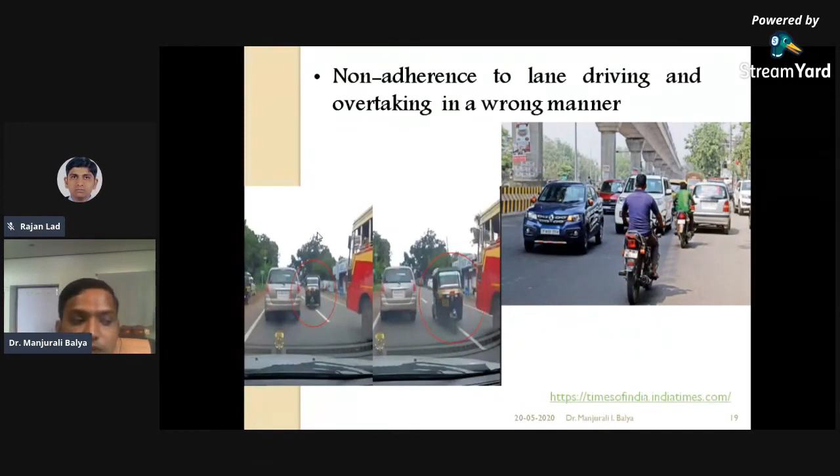Another reason is non-adherence to lane driving, or overtaking on the wrong side in the wrong manner. You can see in the picture that an auto rickshaw, trying to find the shortest distance, is going on the wrong side. But if you travel in the wrong-side manner, that may lead to accidents.

Then attitude of the drivers and pedestrians. Some drivers and pedestrians have the attitude of wanting to go first. The pedestrian thinks they will go first, the driver thinks they will go first and the pedestrian will be late. This kind of attitude leads to accidents and is also a creator of accidents.

Then pedestrians sharing road space with fast moving vehicles. Whenever the crossing facilities are not properly managed, pedestrians collide with fast moving vehicles, because both are in a hurry. So they face that kind of problem with fast moving traffic, and accidents occur. These are the major considerations and reasons behind the accidents.

Now coming to the crossing facilities. This is what is available in India, but we have to improve it. How do we improve it? By providing clarity, enforcement, proper management, and proper guidelines. This is what exists currently in India.

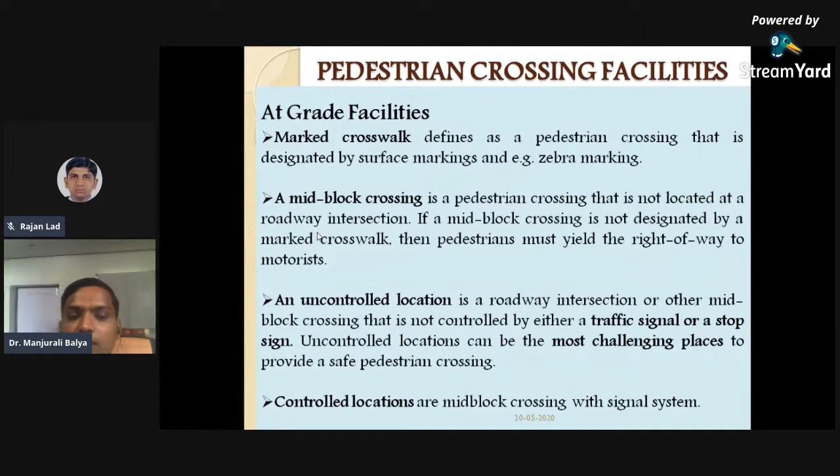Then pedestrian crossing facilities by grade separation. There are two types: over bridges and under bridges or subways. Often pedestrian crossing facilities are provided through over bridges, but if the height is too high, escalators are used for pedestrians, such as at metro stations where escalators should be provided at the over bridges. Subways are categories of facilities where pedestrians move below the road, through underground facilities.

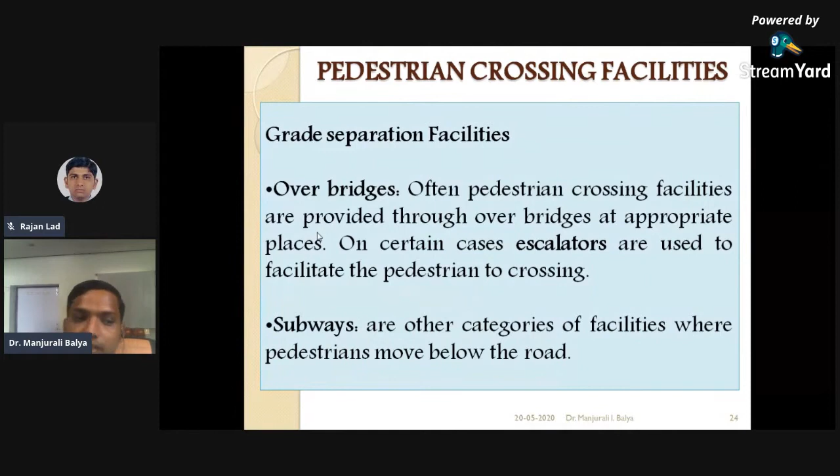Now we have to go to the advanced technology. We started with the pedestrian definition, then statistics - what is the actual statistic of India, what are the reasons behind it, and what are the existing problems or existing facilities provided. Now coming to the advanced signal of the pedestrian crossing system.

Here there are two parts: one is advanced signals, the other is advanced technology which is also regarding signals. So first, pedestrian signal. The advanced pedestrian signal, which occupies very little or negligible space, is the pelican crossing signal.

Let's consider the system - I will show you a video also. There the pedestrian can push a button. This addresses the earlier problems shown, like collisions or the attitude of pedestrians, as well as overspeeding.

Whenever the pedestrian comes to the zebra crossing or near the crossing, he will push the button switch and call for the green time. At that time, amber will show to the vehicle, so they will try to slow the vehicle, and whenever it comes to the crossing it will stop. Red is shown to the vehicle side so the pedestrian can move with the green time safely.

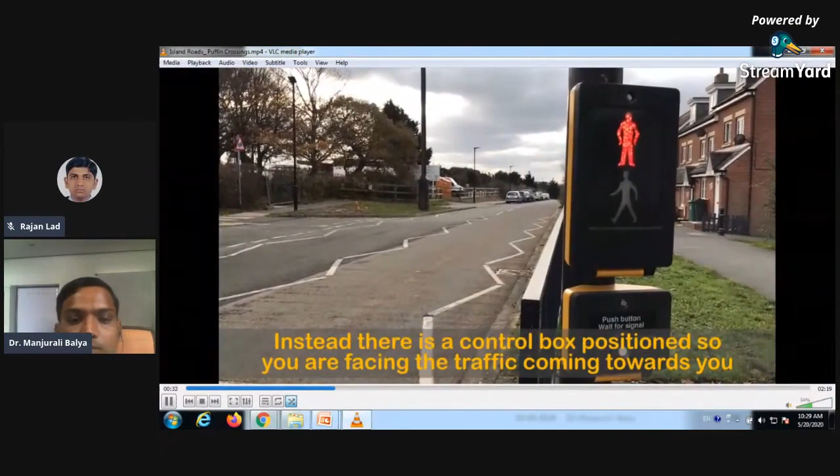So when the pedestrian pushes the button, now pressing the button, you have to wait, and then green will start.

So when the green signal becomes active, then red signal will be shown to the traffic or vehicles. So they will stop there, and the pedestrian will move easily.

And then after, when he reaches, the red light pedestrian signal will be shown, and green light will be shown to the vehicles. So it is also beneficial where the vehicles or drivers will be aware, and they will stop. So they must slow down here when they see that.

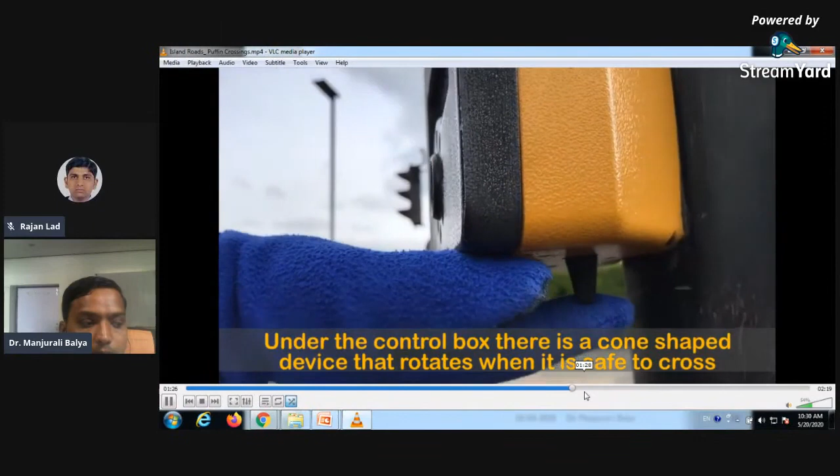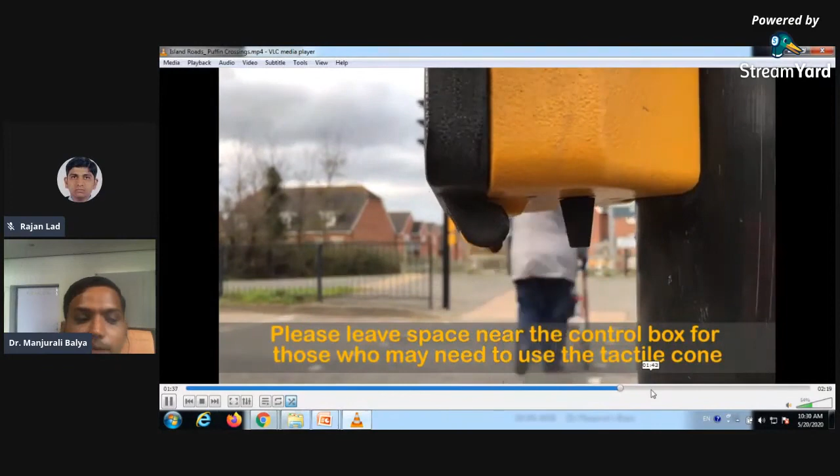It is also helpful to the elderly or impaired person who is physically challenged. So this is the second one. First is the pelican, another is the puffin crossing.

Third one is the toucan crossing signal. It is given the name toucan, meaning two can - bicycle and pedestrian - so it is given as toucan. That is why the toucan was chosen. So the video is showing that...

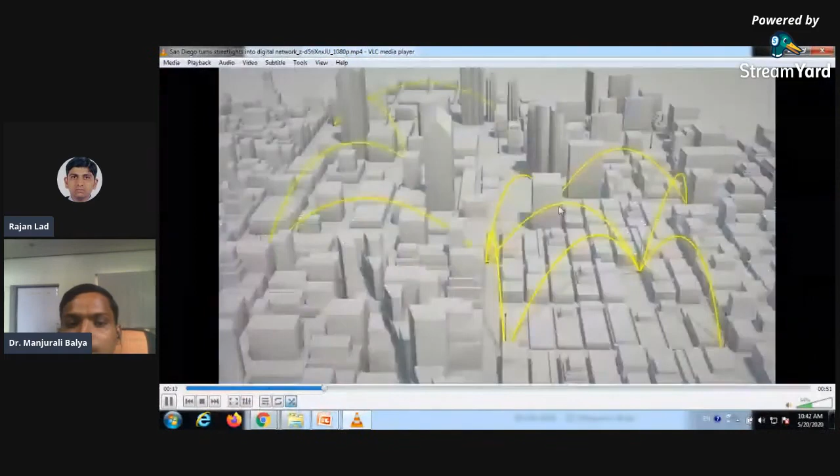So this is the street light with camera, showing how it's observed. It's connected to some standard case study area. Then it will be measured to some cloud, or some software, and that will capture with audio - not only photographs or graphics, but it is also measuring the audio. If any crime is going on, that is also measured by these cameras. So this is the system where we can reduce accidents and also crimes in India.

Then the zebra crossing innovation in France. Here in this one, the yellow strip will stand up when any pedestrian is crossing. I'm showing in the video that innovation. It was provided first in France.

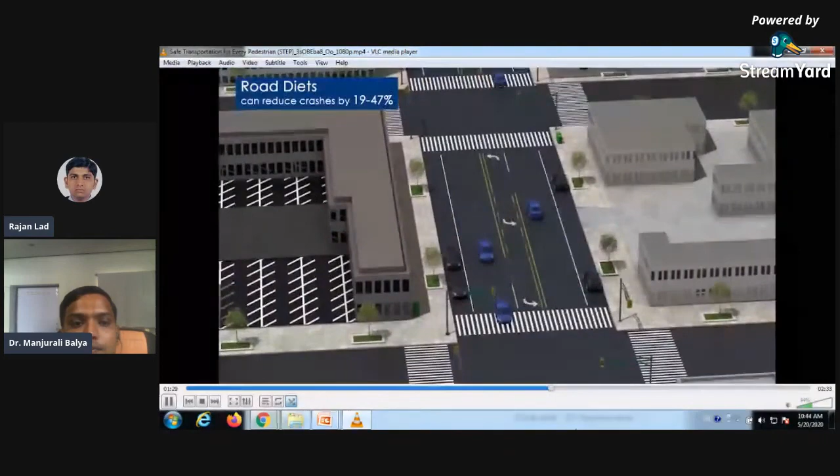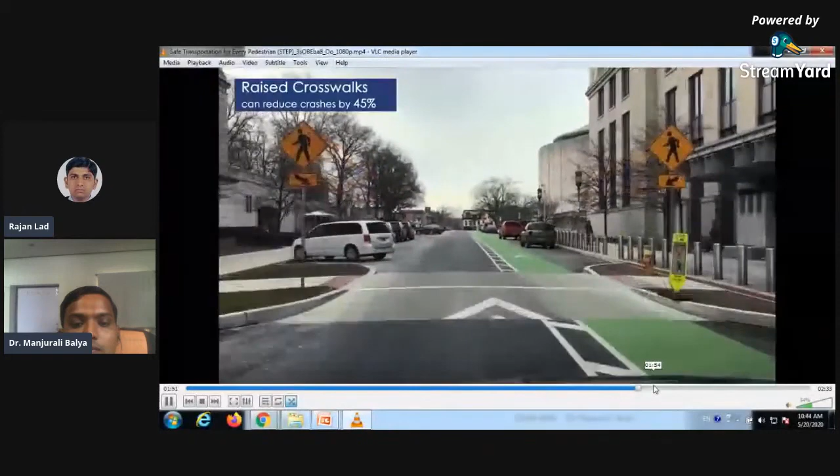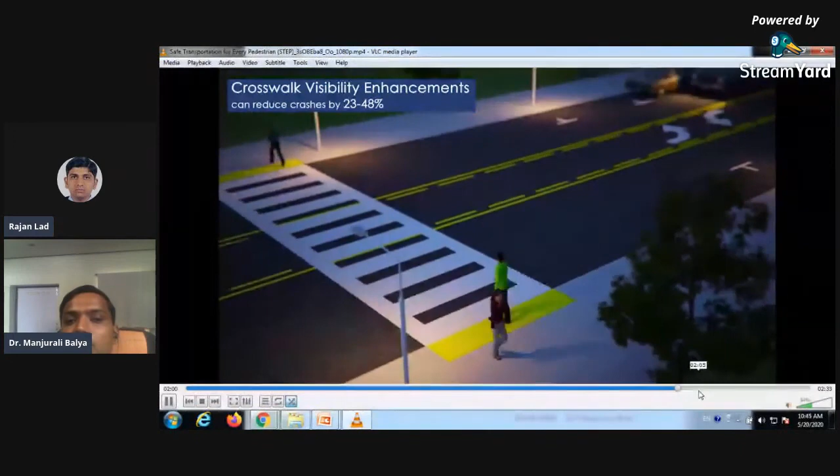So this kind of strips will come out, and signs also come out. So what happens is that vehicular traffic must stop at that place, and then pedestrians can cross, and then after, vehicular movement resumes, so it will create safety for the pedestrian also.

Smart crosswalk prototypes, similar to the Dubai planning. Here there is the red light, and here there is the green. So whenever a pedestrian comes, the detection is present, then they must get here a red light, and the pedestrian can easily move with the green, as well as the bicyclist.

So also when the pedestrian comes, the red light will make a reduction of accidents. So similar to the Dubai planning, this is also helpful for the reduction of pedestrian crossing accidents.

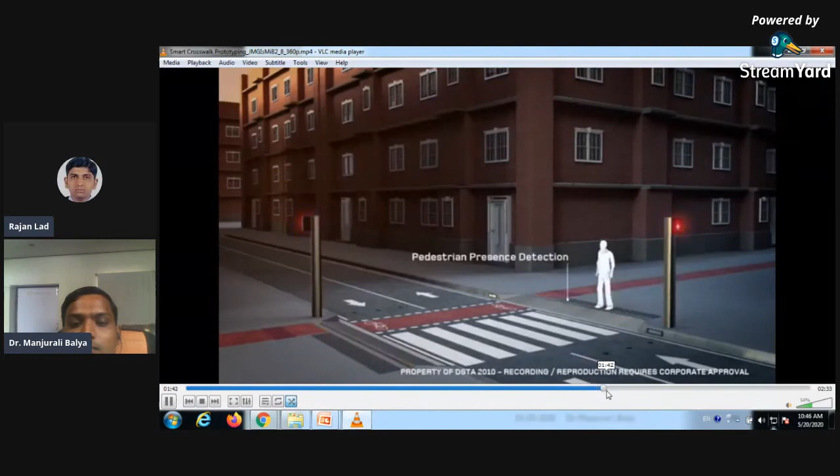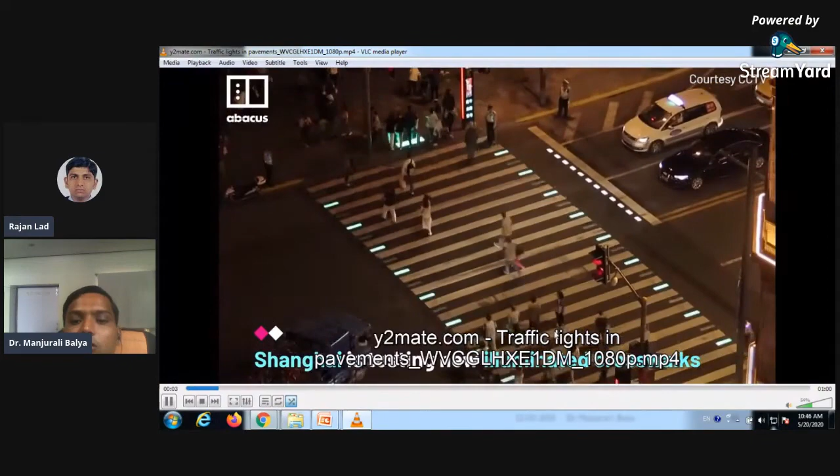Another facility is traffic lighting into the pavement, like blinking of the strip. Whenever the pedestrian is crossing, it will provide the pedestrian the green light, and the vehicular traffic will get the red light. When clearance comes out, then the vehicular traffic can move. This is the facility provided at global level, and we can also provide this kind of system in the future.

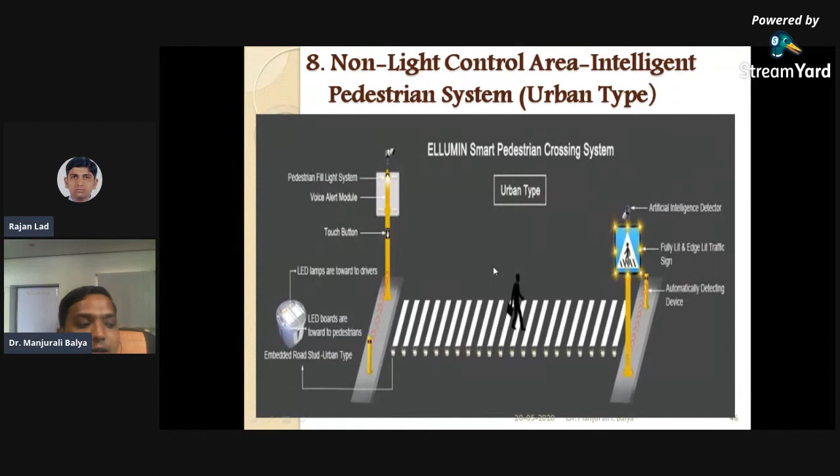Then there's the non-light control area, where there is no facility, or away from the city. So ELLUMIN smart pedestrian system is provided in urban, suburban, and rural areas. In that, activation equipment includes infrared sensing bollards.

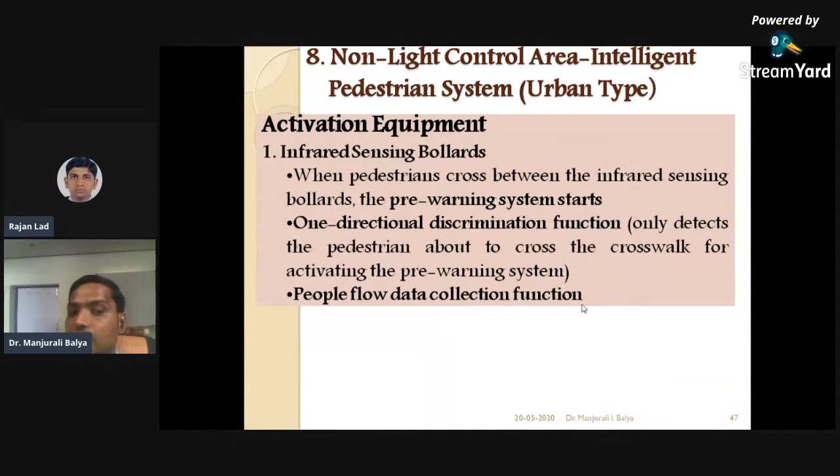When the pedestrian crosses between the infrared bollards, the pre-warning system starts. The one-directional discrimination function only detects the pedestrian. Whenever the pedestrian comes to cross above the footpath, they trigger one of the infrared lines. This is the infrared sensing bollard with pedestrian flow data collection built in. Automatically, a red light comes out to the vehicular side when the pedestrian comes to the footpath or crossing side, and a green light starts on the pedestrian side.

This is also an innovative technique we can provide where pedestrian accidents happen.

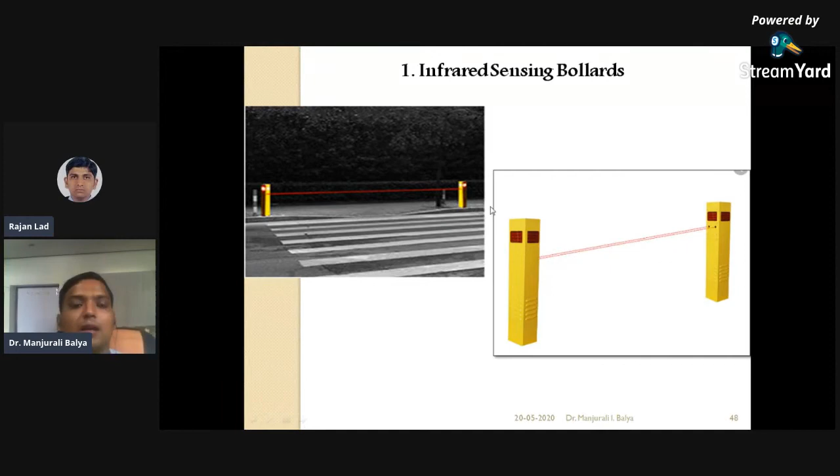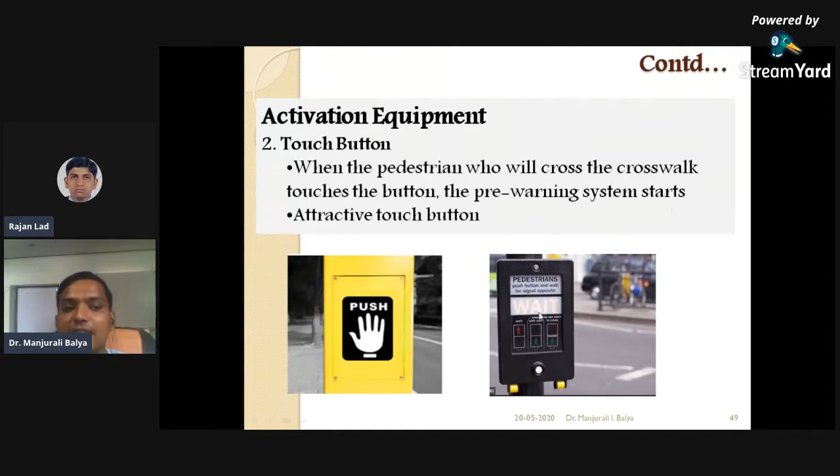Another facility is the touch button. It is simple and not available in India, but you push the switch, like a pedestrian signal, pelican crossing system, or puffin crossing system. At that time the pre-warning system starts with an attractive touch button. So touch button is also a part we can provide.

Then there's the intelligent pedestrian system camera. In this system, where the pedestrian moves into the detecting area, the pre-warning system starts and the vehicular traffic is stopped. The directional discrimination function only detects the pedestrian who will cross, for activating the pre-warning, and it finds out the freely set detection area. This kind of facility can be provided in the future in India.

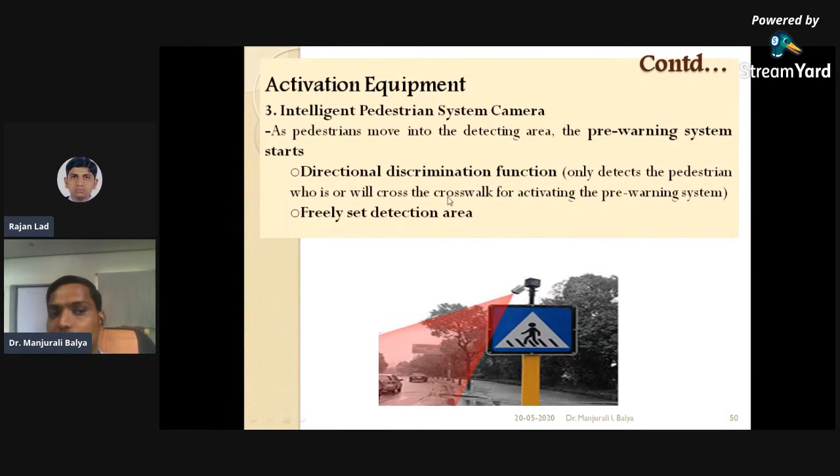So here's one video of that Ellumen pedestrian crossing system.

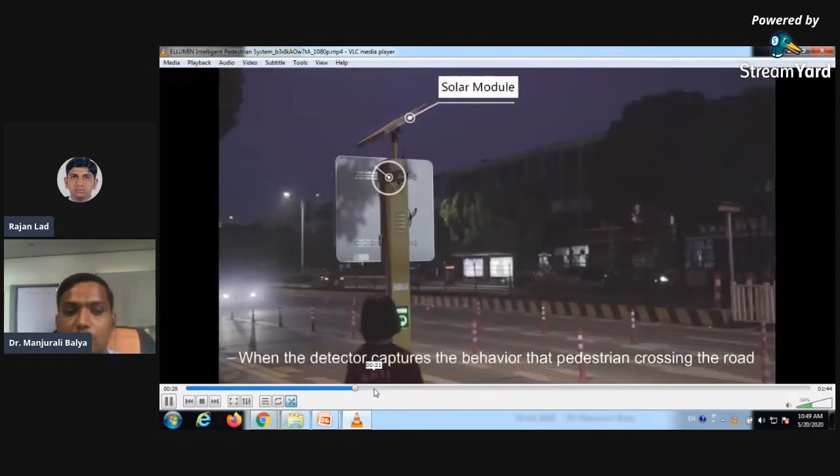So the voice alert is there, which alerts the signs, and drivers are ready to slow down. Here you can see the blinking if a pedestrian is crossing, so the driver must stop. The pedestrian can easily and safely cross, and then the blinking stops and the pedestrian can move. So this is the facility of the pedestrian crossing.

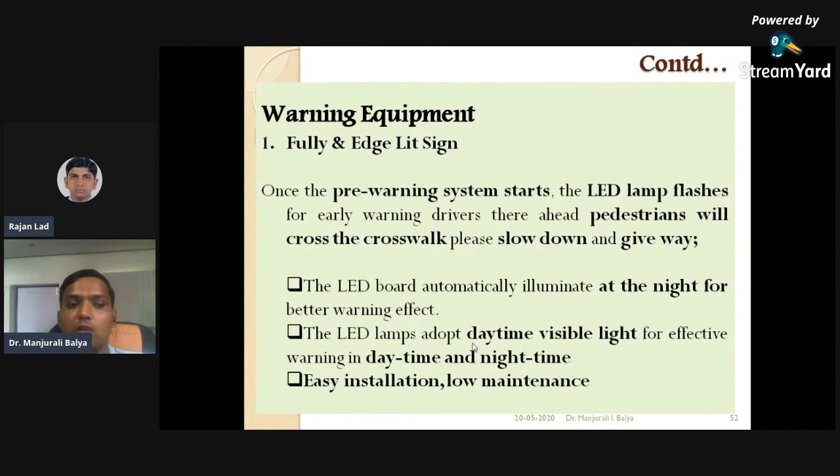Some warning fully and edge lit signs. We have almost 10 minutes remaining, so I'll go quickly. Pre-warning LED lamp: at night there's visibility, and during daytime a reflector is provided, with easy installation and low maintenance. This is the same as the fully and edge lit signs we provide earlier. Whenever the pedestrian comes here, it will blink.

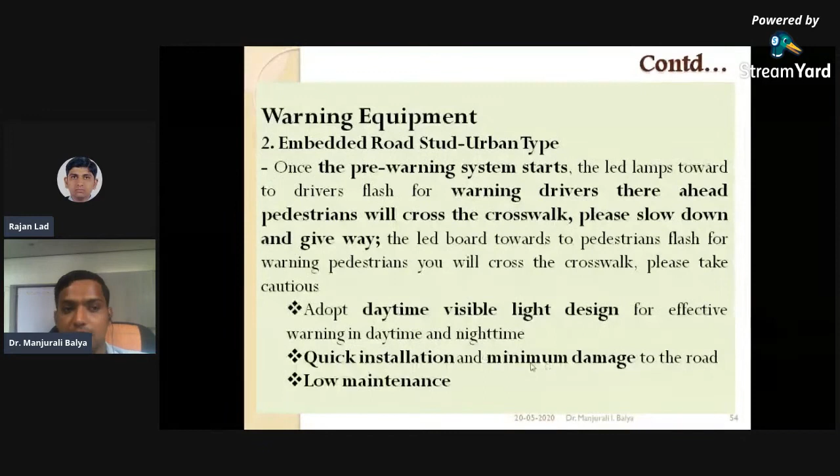Another is the warning road stud, which warns the driver side for pedestrian crossing the road, to slow down and give way. This is the sign, with daytime visible light design, quick installation, minimum damage to the road, and low maintenance. This can also be provided in the future illumination system in India.

Voice alert system, where the pre-warning system starts with a voice alert module. I'll show you in the video: whenever someone presses the module, or pushes the button, this kind of voice alert will start blinking, and the voice will give the green time while showing the vehicular side.

Then the pedestrian fill light system will automatically operate to illuminate the pedestrian waiting area, giving better warning to the driver. This kind of facility can be provided in the future.

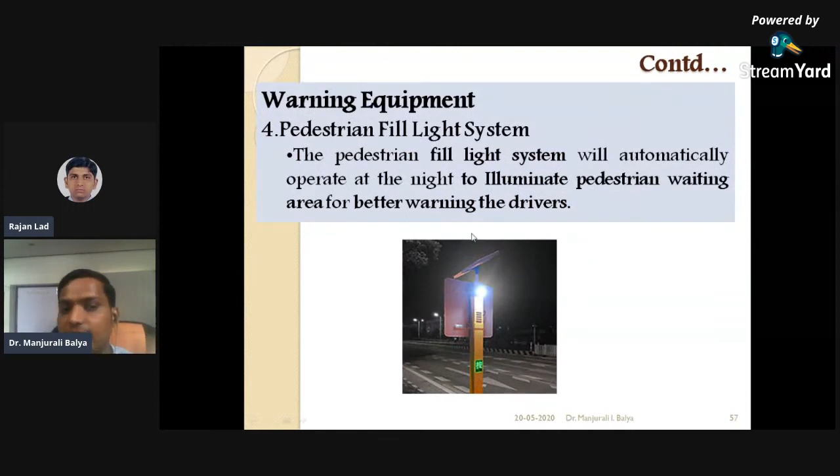Now, based on this advanced technology, a pilot study has been carried out in India in Hyderabad city.

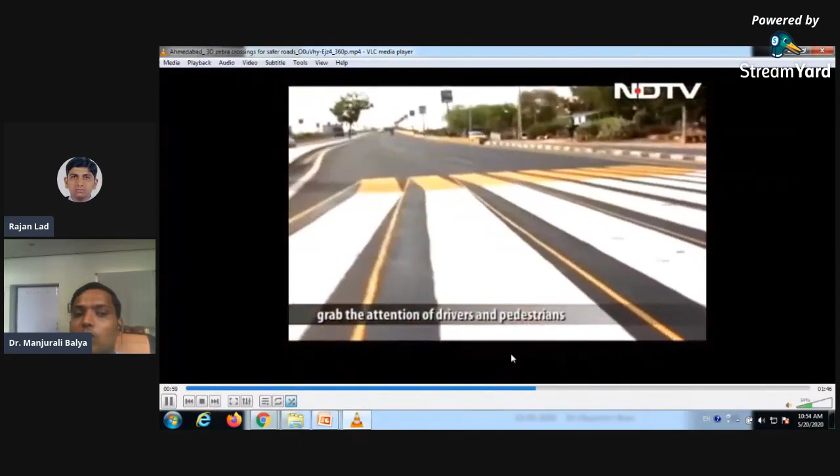And the zebra crossing for say, for Ahmedabad. Ahmedabad has also implemented 3D zebra crossing, as our students, one of the two female groups, have prepared this 3D crossing. So it looks like, from a far away distance, it can seem like some stones are put into the road. So the driver must stop at that place. But when he comes here, there are no stones, or you can say the strips with the stone effect are not there. So 3D zebra crossing will be helpful to India, and it has also been implemented as a pilot project in Ahmedabad, where accidents happen. It is a very low cost system we can provide in India.

And another one, in Delhi, for a Rajmarg road, this kind of project has also been provided as a pilot project in India. So this is also a 3D zebra crossing provided, so the driver will find that it looks like some stones are there. So they will stop or reduce their speed, so pedestrians can move and cross safely.

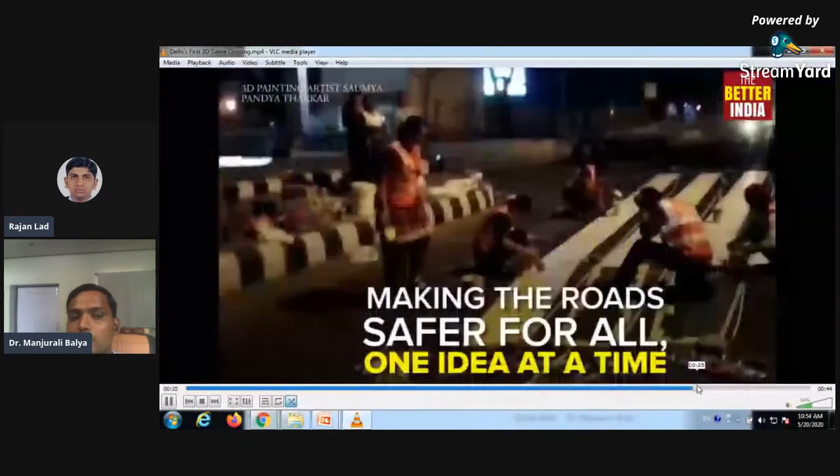Now this is some of the latest technology available at the abroad level, and from that some pilot projects have started in India. But if we can consider or go for some of these systems to implement, then we can reduce accidents at pedestrian crossings, because they are vulnerable road users. So we must consider the safety of pedestrian crossings.

And the summary of this whole presentation, I would like to share that from the starting of the problem, we discussed pedestrians, then road statistics, then I gave a discussion about what are the problems or reasons behind these accidents, and then what facilities we can provide or improve existing facilities. Then, advanced technology available at a global level and advanced technology available in India. So this is a small summary of the whole presentation.

So if time permits, I will show how you do the study or how you will provide the modeling part.

Rajan, is there any time? I will go to a small PPT, in 5 minutes I will show it, because some researchers, research scholars, faculties, and MTech level students are there, so they will do this in the future. Okay sir, we have only 5 minutes. Only 5 minutes, okay, so for discussion time, maximum we have 10 minutes. 10 minutes, so I will quickly go through the modeling part.

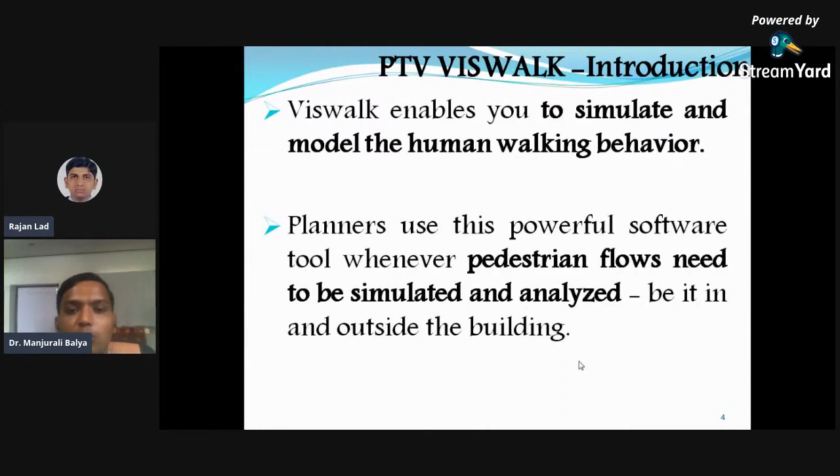This is simulation of human behavior, and we can do application of the multimodal environment, then human behavior, finding out boarding, alighting, crossing streets, likewise. This is the application of PTV Viswalk. Then what is the output? I will not explain every slide, just quickly go through because we have only 5 minutes.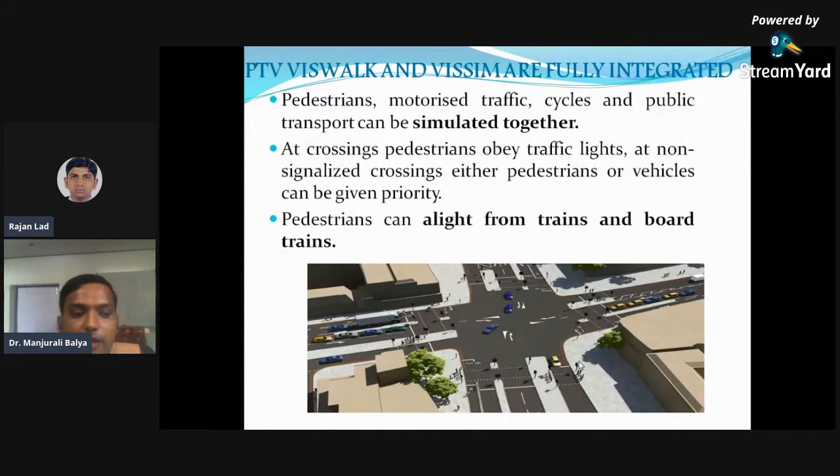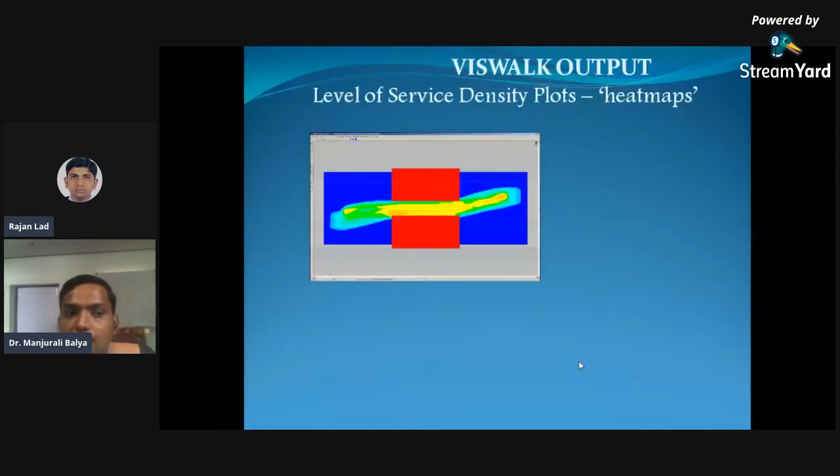So this is crossing, alighting from the pedestrians. What is the input? Survey by manual origin metrics, ticketing, mobile phone data, GPS system, permanent counters. So you can find out this kind of output by the Viswalk.

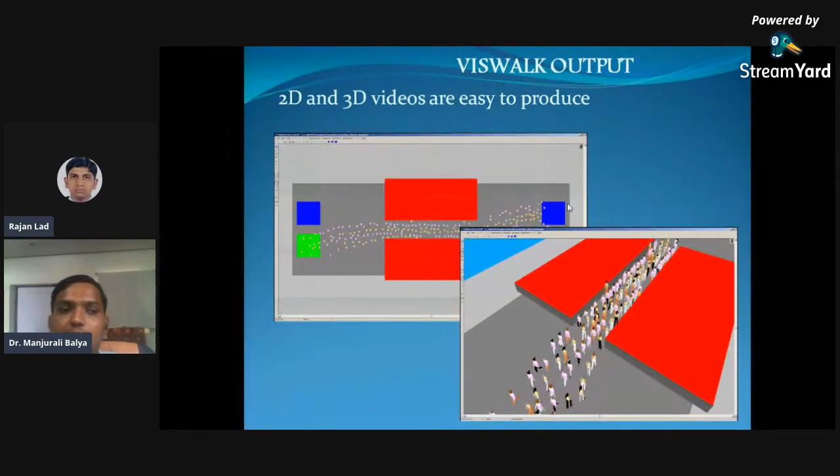So this is the pedestrian output from the simulation. This is one software. Another is AnyLogic. It is also applicable for planning, managing, and operating, majorly for railway stations, movement, airports, and stadiums, to evaluate capacity, assessing shopping, and likewise. It is also used to find out bottlenecks.

There is one video, but I will not open that. You can go through it, and at last I will share my mail ID. If you have any query regarding these softwares, you can mail me.

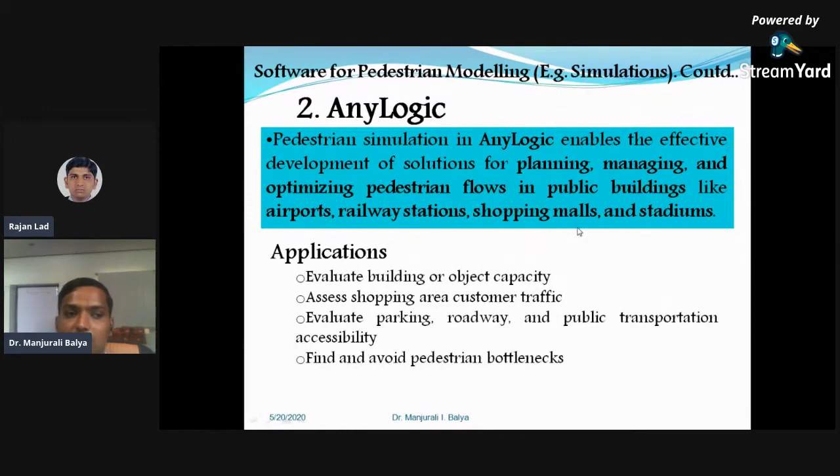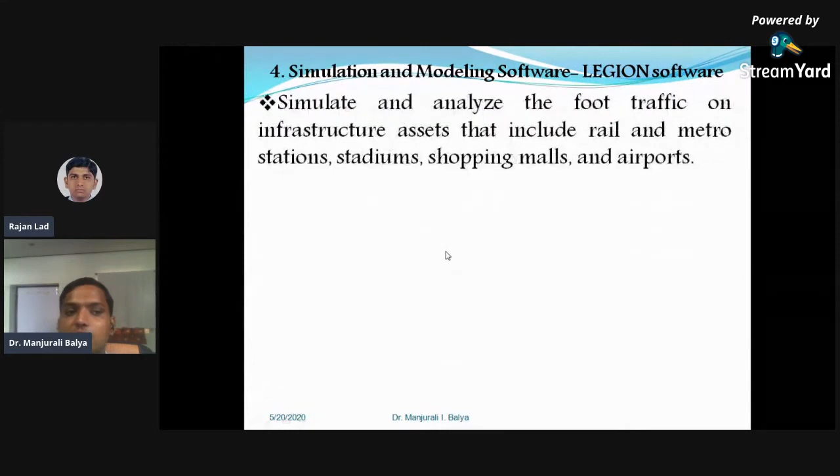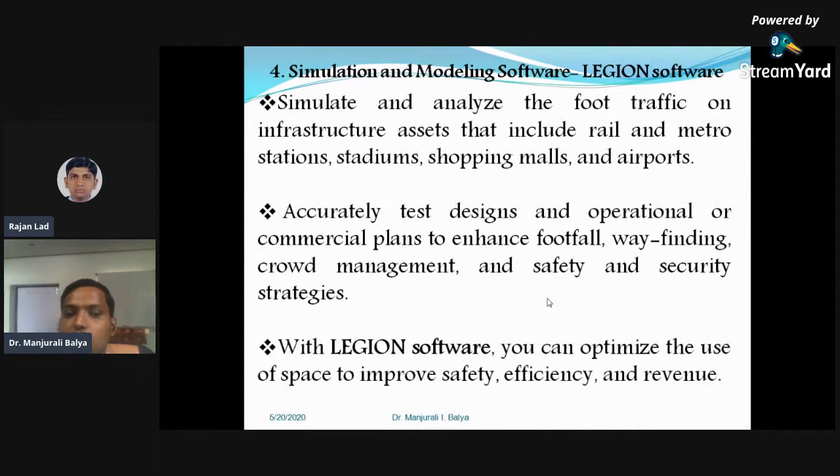Then another one used is Legion software, for simulation and planning of footfall, wayfinding, crowd management, safety and security of pedestrians. It also helps optimize safety, efficiency, and revenue. One video is there, but due to time limitation, I will not open it.

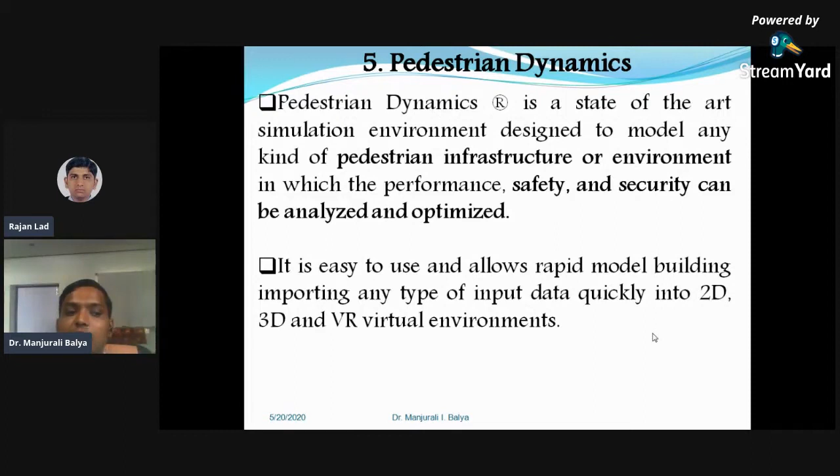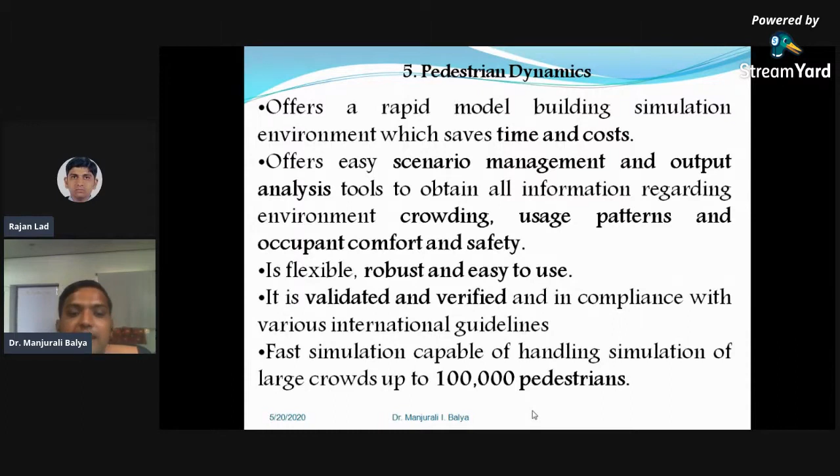The validation and verification of the data should also be done for the dynamic. And last is the Vadere software, an open source framework for simulation of microscopic pedestrian dynamics. It provides simulation with cars and granular flow, and generates human behavior and simulation models.

So these are the various categories of pedestrian flow where advanced technology is required for modeling. If you do the model, it will be helpful, or it will be validated by the software. So these are the softwares I'm providing at the end. Now coming to the question side, we have almost 5 minutes, so we can conclude here.

Any questions? Hello sir. Yes, Rajan. There are some questions, one of our students is asking a question.

During your presentation, pedestrian deaths, is that globally or India? In one of your slides you mentioned some killed record, is it globally or India, this whole data, can you clarify? Let me see which slide I showed. If the slide number is given... not given. That's okay, no problem.

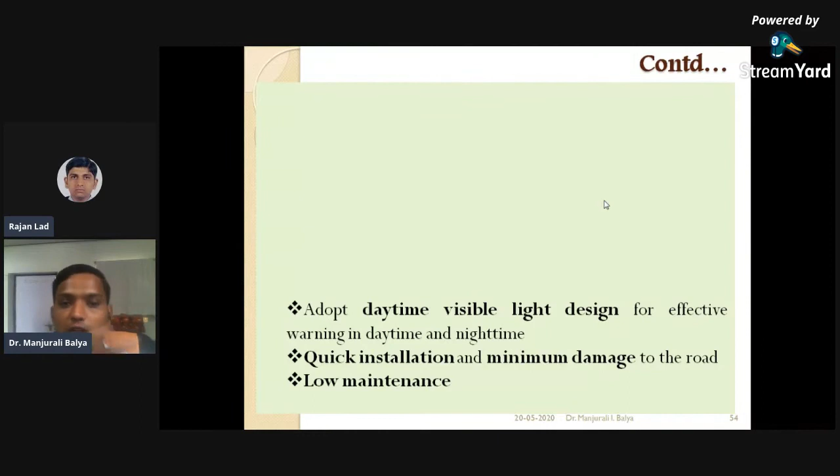So the whole data which I have mentioned here, by the literature, is only for India. We have not compared it at the global level because we have to implement these facilities in India. Earlier reports show that China has lesser experience compared to us, and due to limitation of time, although we have lots of data, I tried to explain only the condition of India, so you understand what facilities we can implement as existing or in the future. So the whole data shown is comparative to the India side.

Sir, there is another question. In a CBD area like Kalupur, there is no pedestrian facility, no signal is there. So what can we do to reduce the accident?

So into Kalupur, I don't know the actual statistics of pedestrian crossing, but first we can try for a zebra crossing with reflector. Earlier I showed advanced technology, but if we find statistics here, we can determine the requirement for that existing area, because place to place there is variation. So you have to do videography and find out, then students from Ahmedabad can go for research, collect the data, and find the existing pedestrian movement. If you find the flow rate of pedestrians, you can determine which facility is better to provide.

But basically, due to limitation, cost consideration and financial aspect, India is majorly facing the problem with financial aspect. So if financial aspect is not a limitation, you can provide pelican crossing, puffin crossing, or zebra crossing with reflectors.

Sir, actually it is only mentioned 'how to'. Okay, I will give you a brief on how did we learn and know about this. He is trying to learn, but what is that? Earlier I also faced this problem, that there are no consultancy or classes going on for this kind of software operation, but some of the literature helped, because I'm giving you one example.

Vissim, in terms of network characteristics - I found that I learned Vissim from YouTube. There are many videos available because there are no classes going on, but some of you can find help from SVNIT, as they have the licensed version of Vissim, or LD if they have that. Then you can collect some information or make contact with some faculties of that particular institute, then you can learn, because as per my knowledge there are no classes going on. I learned a small portion of network characteristics in Vissim from YouTube.